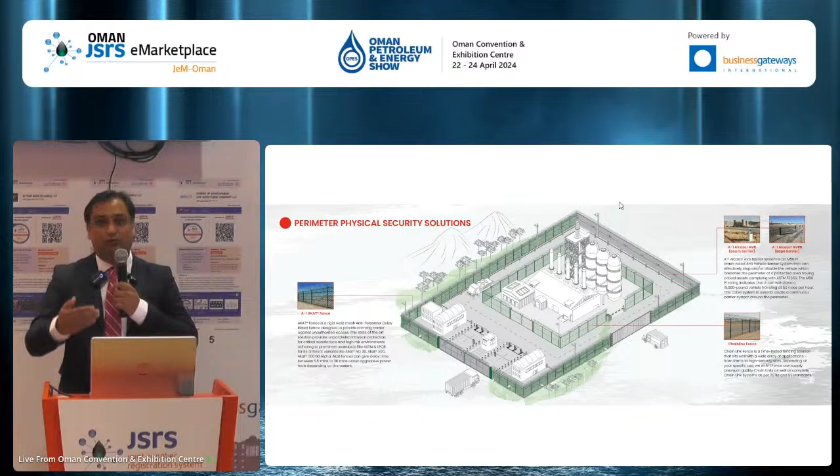To start with perimeter physical security systems, these are systems which will prevent an intruder from trying to get access to your perimeter. This will include all types of physical security fences. Next comes the perimeter intrusion detection system. We have something to prevent the physical intrusion, but now things have become more advanced. Companies want to see pre-detection, who is trying to intrude, so they have early detection.

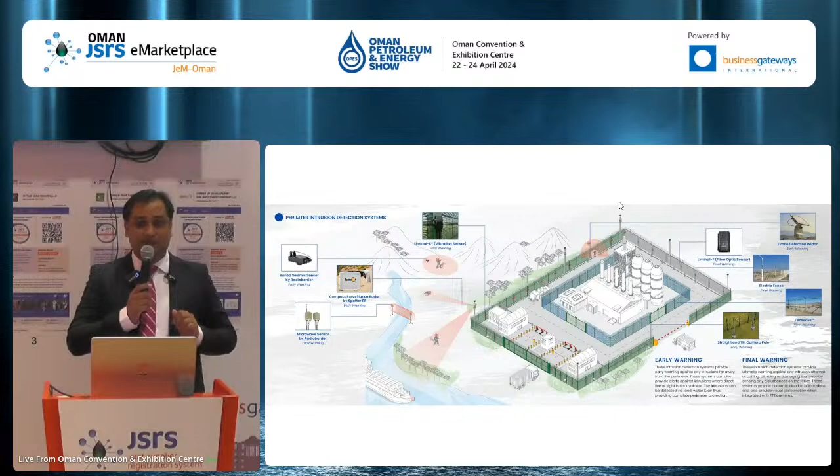Now what do you have in early detection? We have radars, we have cameras, we have something called seismic sensors which are buried underground. On the fence, we have optical fibers; that's your perimeter intrusion detection system. And we have electrical fencing.

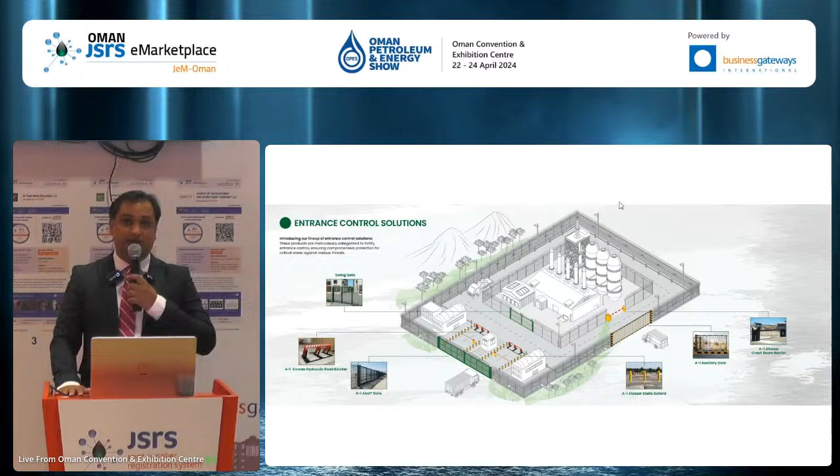Going ahead, entrance control solutions. Now we have detected someone who's trying to intrude your perimeter through an active solution. We have something that is going to prevent physical entry of a person. But what if there are vehicles coming at high speed trying to force entry into your perimeter? For that, we have a range of crash rated products: road blockers, static bollards, and barriers, which are rope and beam barriers.

I'll take you through the range of products that we have, starting with physical security. Physical security has been categorized into low, medium, and high. Low security is chain link fence systems, used for demarcation. Apart from chain link fence, you have the honeycomb fence system, which is also for demarcation, but a little more secure than the chain link fence system.

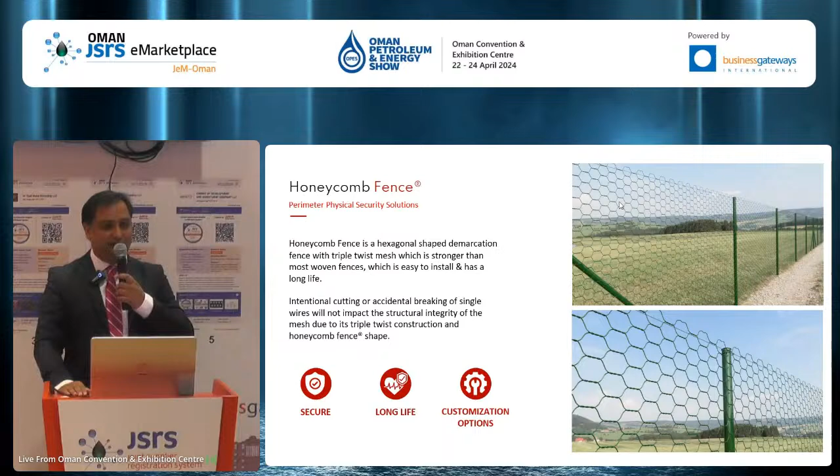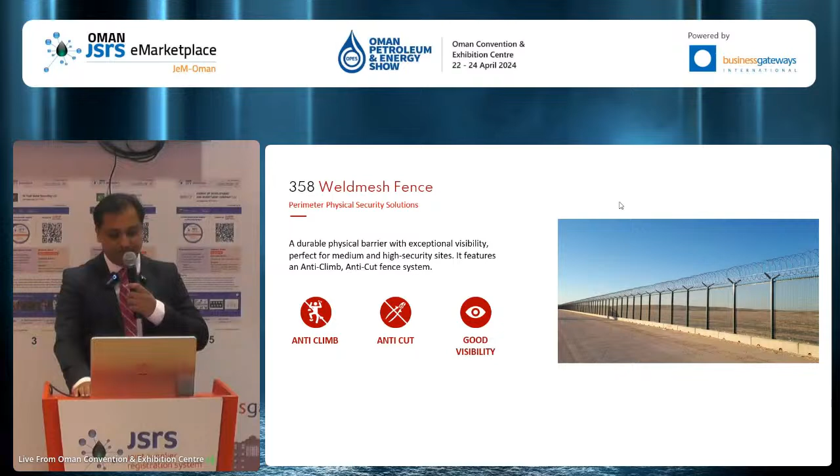A few years back in Oman, a decree was passed by the Royal Oman Police Oil and Gas Division that any critical asset needs to be fenced with a system which will have a minimum delay time of 1 minute and 10 minutes. Let me explain what a delay time of 1 minute and 10 minutes is.

Any person trying to cut a 1 minute delay rated fence should take a minimum of 1 minute to cut and intrude. Similarly, if he wants to intrude your asset by cutting a 10-minute delay rated fence, he should take a minimum of 10 minutes. I'll quickly show you a few videos of 1 minute and 10-minute testing that was performed live in the presence of the ROP Oil and Gas.

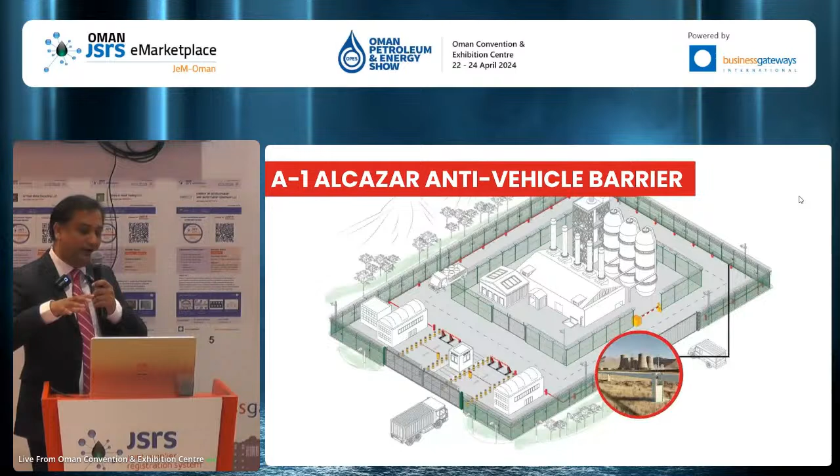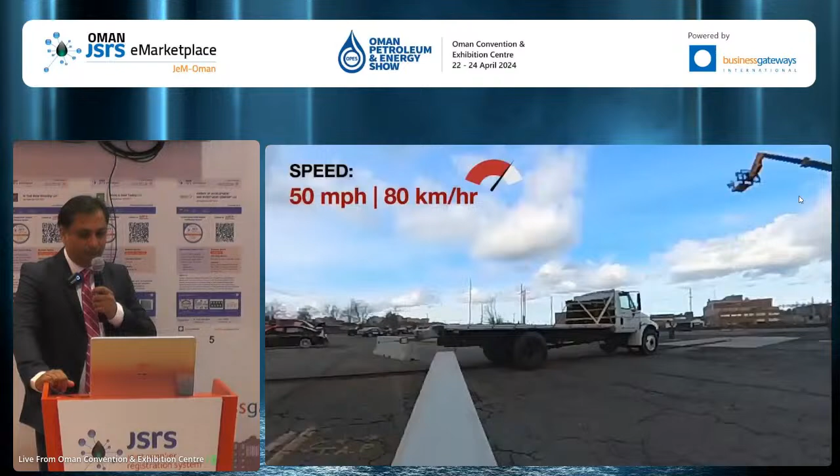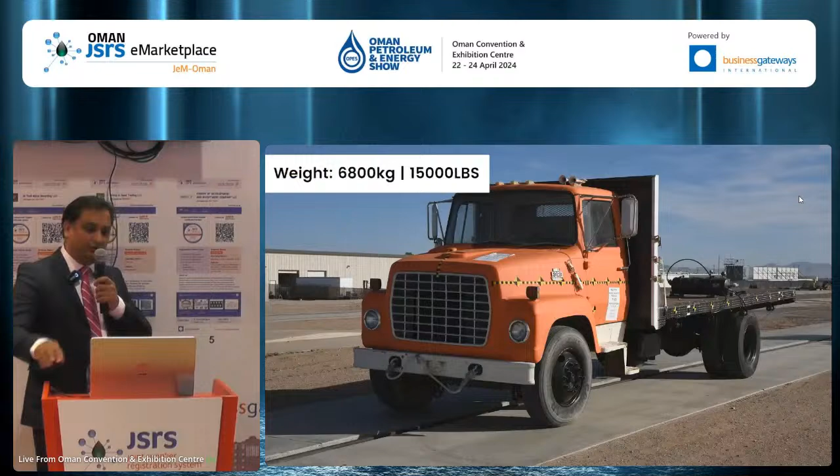So this is our beam barrier. Here you would see that a vehicle traveling at 50 miles per hour and the weight is around 6.8 tons, and it tried to force entry, and the maximum penetration that was permitted was 1 meter. This is a rope barrier. Again, it restricts a vehicle for up to 1 meter.

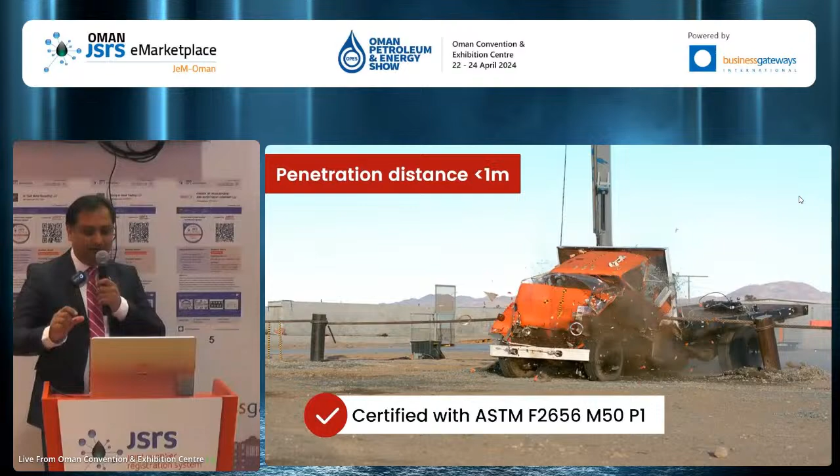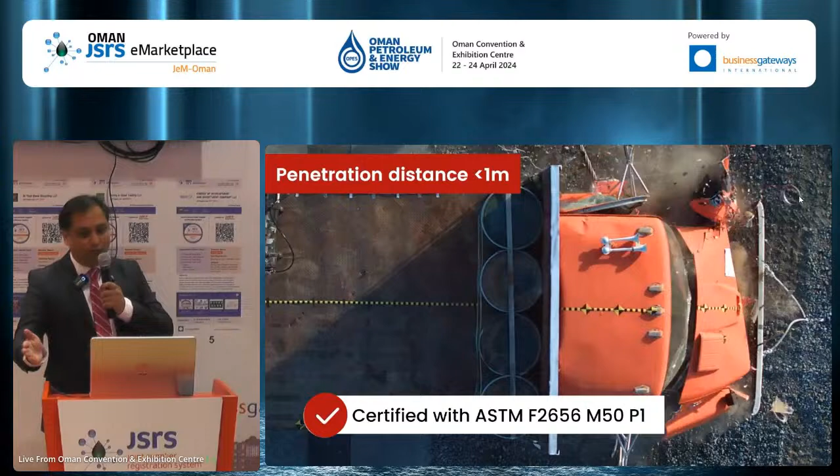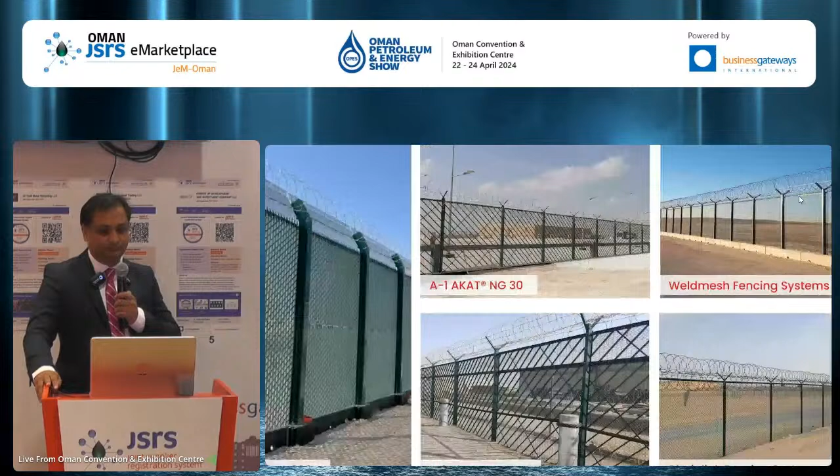So this vehicle is M50. It is tested for M50P1. That's a medium-sized vehicle traveling at 50 miles per hour. So after the impact, it can only travel up to 1 meter. If it travels more than 1 meter, then the test is failed. These are photos of a few of the projects that we have completed.

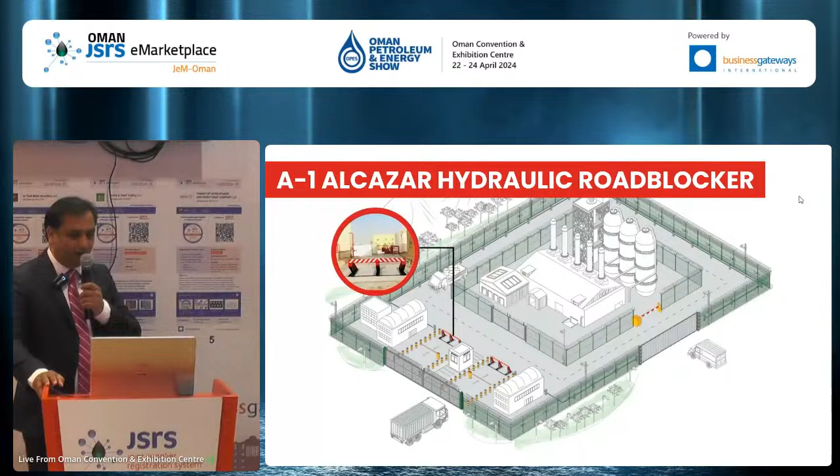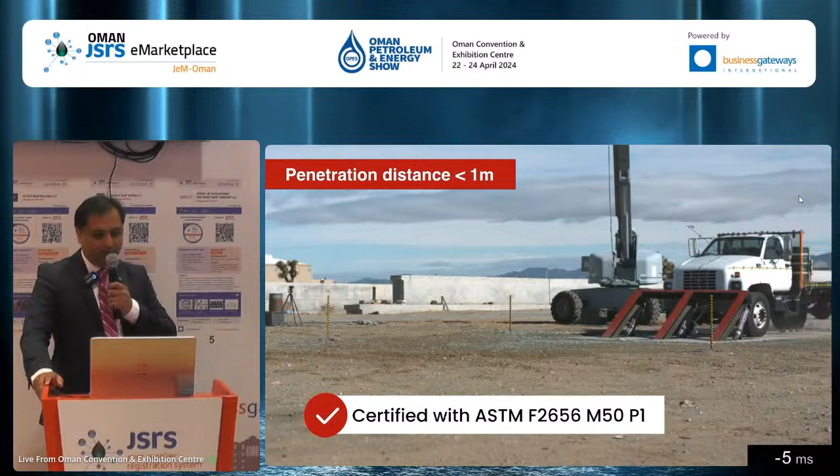This is a testing video of our hydraulic road blocker. You can see the operation. So now the testing is done on 6.8 tons vehicle traveling at 50 miles per hour. So after the impact, the maximum travel that the vehicle can do is only 1 meter.

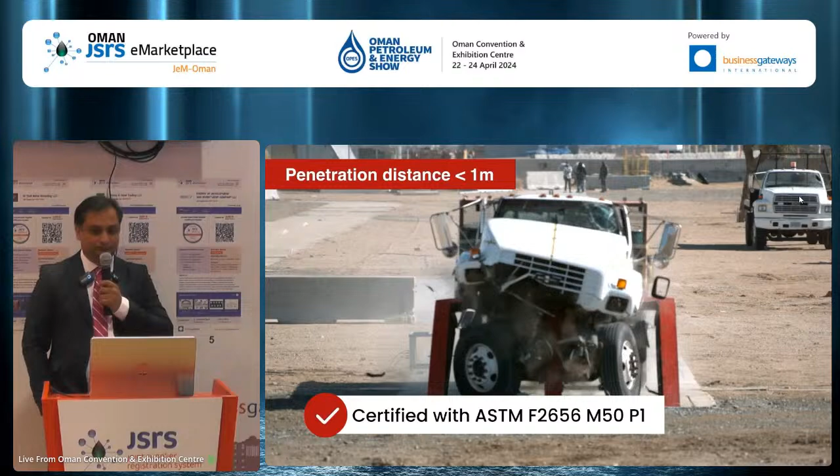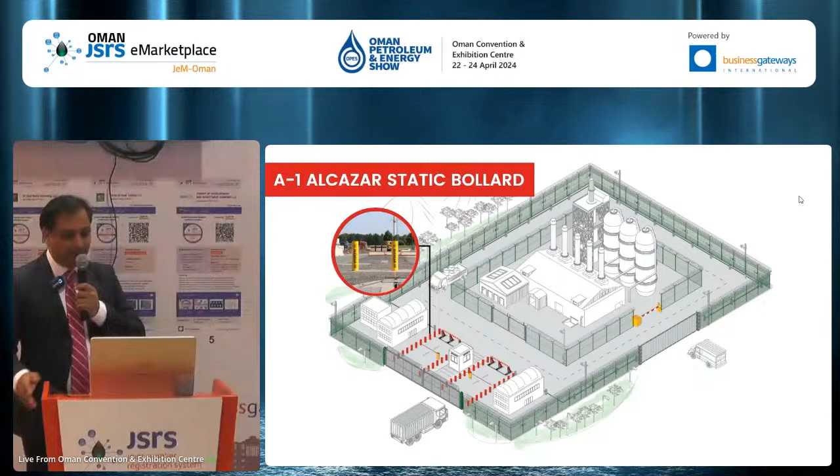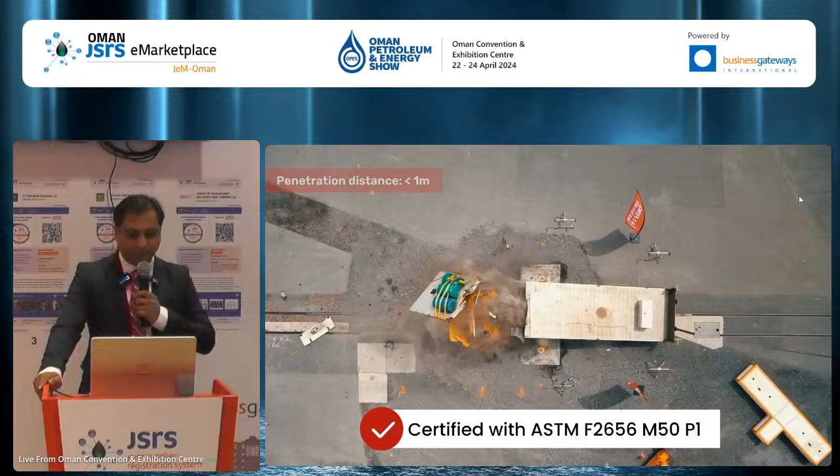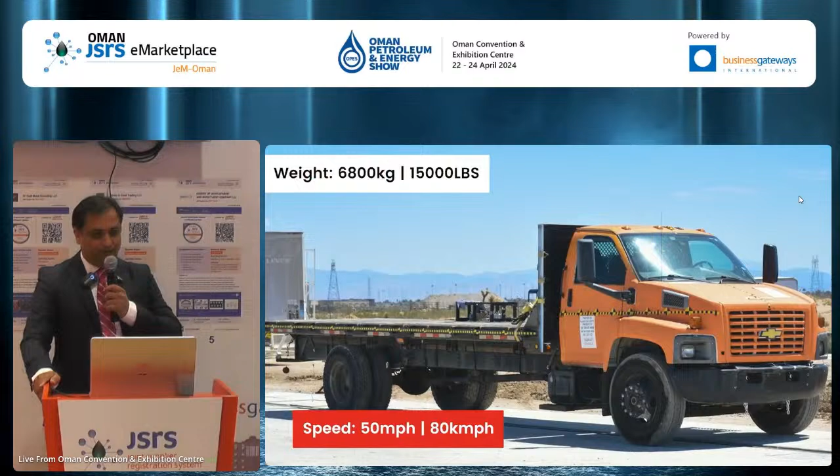The next product is the static bollard. Again, it is tested for M50P1. Again tested as per M50P1.

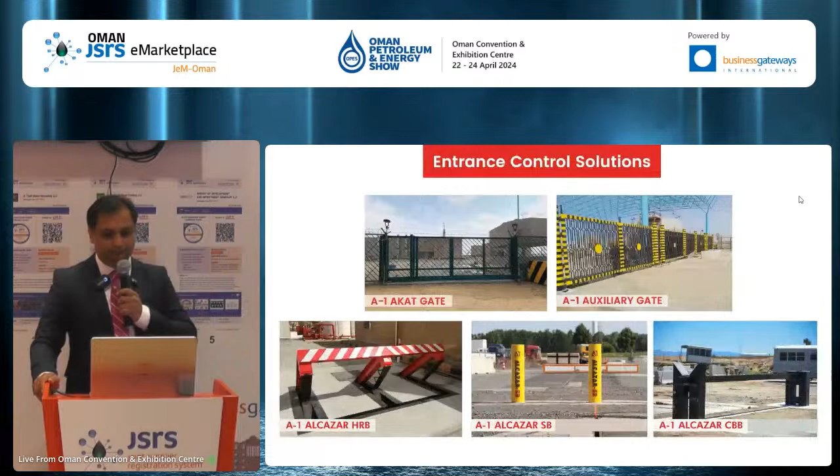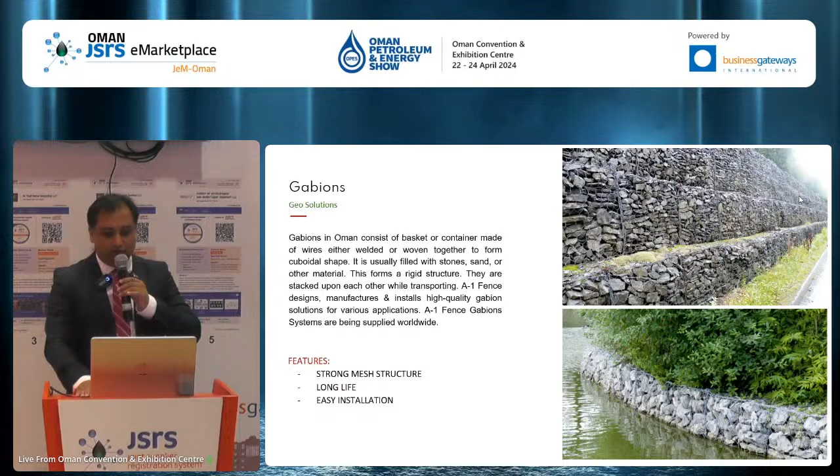So now we have seen products which are preventing an intruder by physical security, and also preventing a vehicle which is trying to force entry into your perimeter. We have few other products which we provide for the road safety. So the first is gabions, and the second are guardrails. Now guardrails also, we have guardrails which are normal guardrails which are manufactured as per OHDS, that's the Oman Highway Design Standard, and we also have guardrails which are again crash tested.

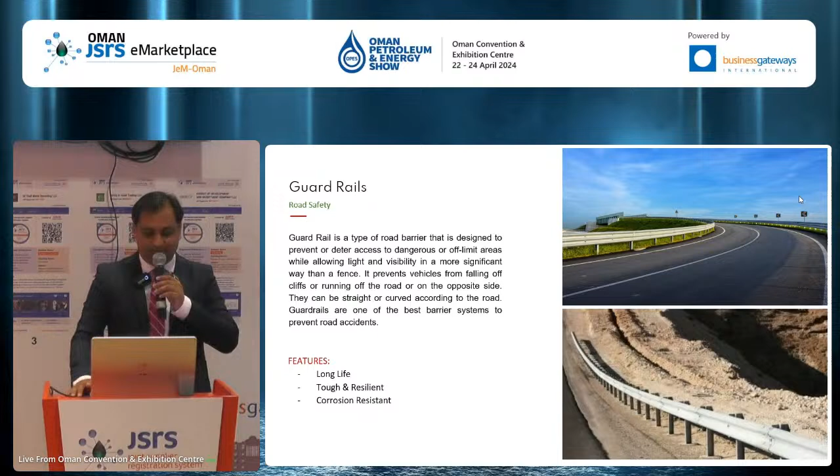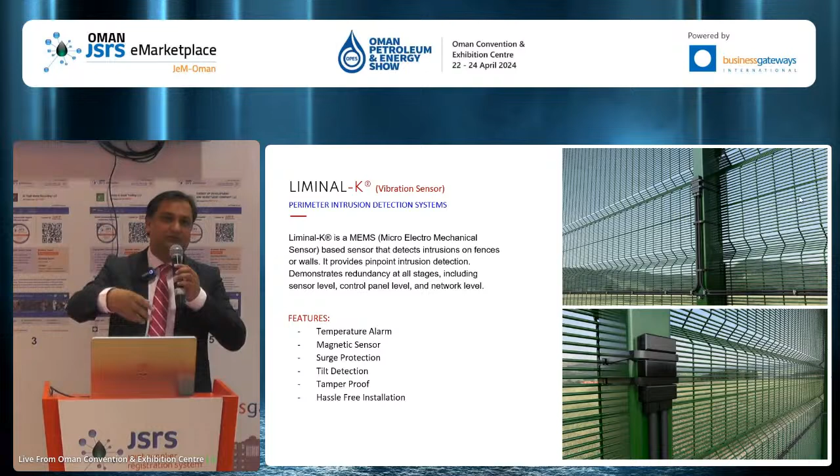The first, it talks about liminal K. It's called as a vibration sensor. So this particular device is installed onto your physical perimeter fence. Now it gives a pinpoint detection. So anyone trying to cut your fence, climb over your fence, or do any activity at your fence, it will raise an alarm into your control room. So once an alarm is raised, you will have your patrolling vehicles coming and catching hold of that guy.

The second product that we have in this range is called as fiber optic sensor. Unlike the previous one which gave a pinpoint solution, this gives a zone detection.

The third product that we have is an electrical fence. So you would have seen a lot of electrical fence installed in substations and on the perimeters. So this gives a powerful shock, but it's a non-lethal shock. All right. So if someone is trying to force entry or enter into a perimeter, he will get a shock. Again, if he tries to cut your fence or do any activity, the connectivity will be lost, and again it will give an alarm into the control room.

Now, most of the time you see that you have a fence, and onto the fence you install your perimeter intrusion detection system. But A1 Fence has been a pioneer in inventing a fence which itself is a detection. So now you have a fence which prevents the intruder from entering into the site, and also it senses. So now we have a fence sense and a razor sense. So anyone trying to intrude into your property, trying to cut, open or climb over the fence, it will give an alarm into the control room.

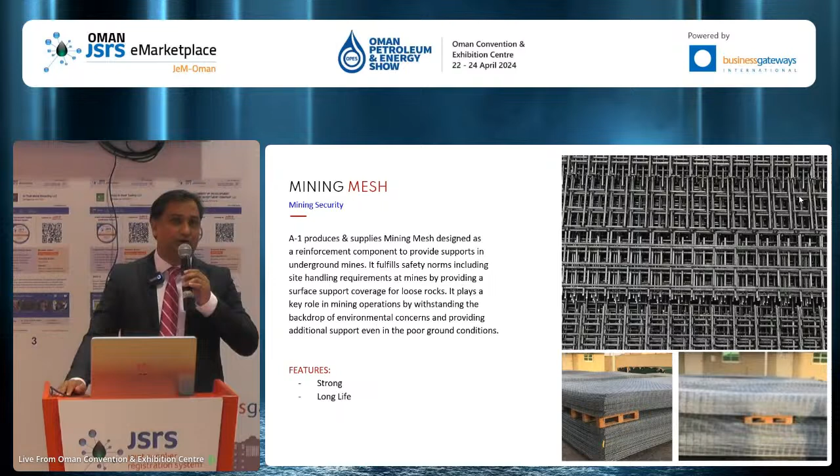We have one more product which we sell into the mining industry. This is called a mining mesh. So whenever there are underground mines, to protect from the loose rocks falling from the top, you will install this mining mesh throughout the entire surface on the top. The last product that we have is a new innovative product. It's a ground screw, a type of pile foundation, which is customized for any type of soil, any type of load condition, and any type of end connections.

So yeah, this is what A1 Fence believes in. It's explore, connect, and grow. What we mean by this is we explore new products, new technology. We connect with our partners, and we believe that together with our partners, we need to grow.